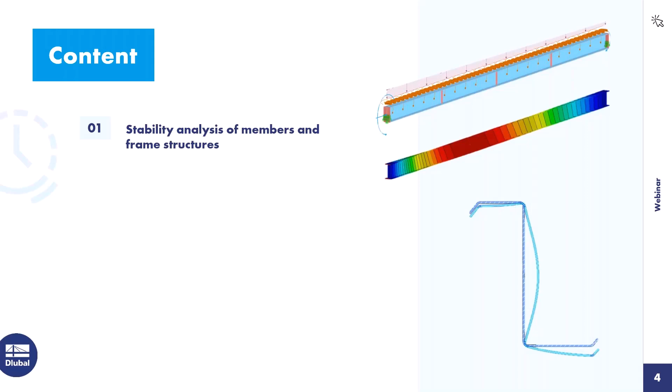Thanks Andreas for the introduction. Within this webinar, I want to show you the linear stability or bifurcation analysis that we can use in Rfem 6 as a tool to assess structural stability, and how to use this tool, including where it's used internally in the background to assist the design of, for example, steel members. I'd like to demonstrate this on some smaller example models that I've mostly prepared beforehand, so we'll jump into more or less finished models instead of focusing on modeling complex structures—we'll do that maybe next time.

The table of contents looks like this. First, I want to focus on the stability analysis of members and frame structures. Second, I want to go to the stability analysis on a cross-section level using the finite strip method. Then I want to show you how the buckling analysis is integrated in the steel joints add-on. And lastly, I want to show how we can use the structural stability add-on for troubleshooting instabilities, how we can leverage that for this purpose.

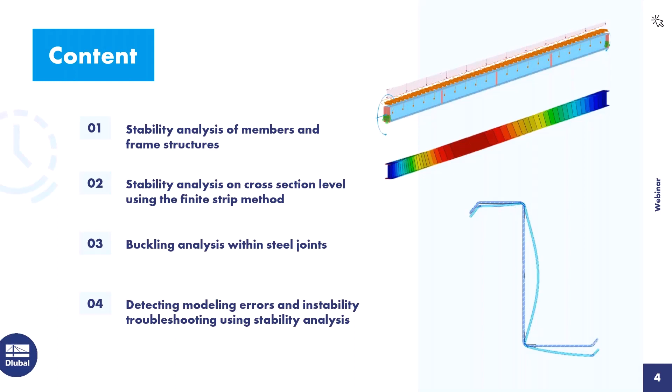Before we jump into the first model, I want to give you a brief introduction and explain at the very least a few points related to the stability analysis and how we perform it in Rfem 6.

What elements or structures are we addressing with this analysis method? It's usually slender members and structures under compression that tend to become unstable, where slenderness is not only defined by dimensions—the greater the length of a structure or member compared to the cross-sectional dimensions, the more slender and prone to instabilities it is—but it's also related to material properties. If I have a material with high strength and low stiffness, stability failure is more likely to be the critical design element as opposed to cross-sectional failure. Lastly, boundary conditions play a major role: if I have rotational or lateral restraints for a member, it's less likely to become unstable.

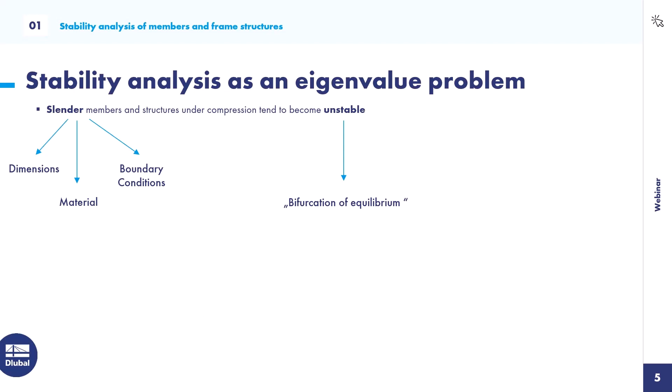What do I mean by unstable? When we reach the unstable state, we have no clear state of equilibrium; instead we have a bifurcation of equilibrium, meaning there are multiple paths the structure may follow. That's why this linear stability analysis is often referred to as a linear bifurcation analysis, or LBA—I might use that abbreviation throughout this webinar—and the critical load may also sometimes be called the bifurcation load.

Using the FEM, the ideal bifurcation load can be determined by solving a conventional eigenvalue problem. So we can set that up and solve that.

In that context, what does ideal mean? It means that for the stability analysis we treat the structure as linear. So we assume a fully linear structure behavior and a perfect geometry, so the base geometry of our model is used in this stability analysis.

The eigenvalue problem in the general formulation has two symmetric matrices, A and B, the eigenvalues lambda, and the respective eigenvectors x. To solve for the unknown eigenvalues lambda, we have to set the first term of our formula to 0, and that's mostly done by calculating the determinant of this first part in the bracket and setting it to 0.

We have multiple numerical tools or solvers to do that determinant determination.

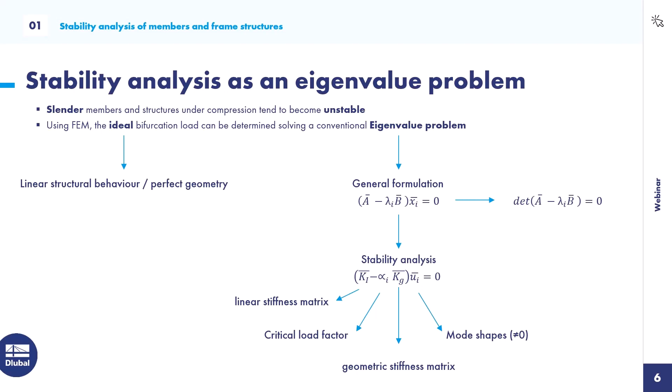We want to start with some fundamental solutions that are very well known amongst civil engineers. Euler already in the 18th century provided some simple analytic solutions for prismatic members under pure compression. They are well known as the Euler cases.

And try to simulate an Euler case 2 and make a small comparison to see if we can evaluate the correct critical load according to Euler, and what else we can get from this structural stability analysis.

So let's jump into the program. As I said, I have prepared some smaller models for you. The first one is this simple Euler case.

I have an HEB 300 beam with a length of 5 meters, and I applied a unit load of 1 kilonewton that sets the member under compression.

In order to perform a stability analysis with our add-on structural stability, I need to first activate it, and I can find it in the base data of the model. I activate the respective add-on here, which you can find under analysis add-ons, and click OK.

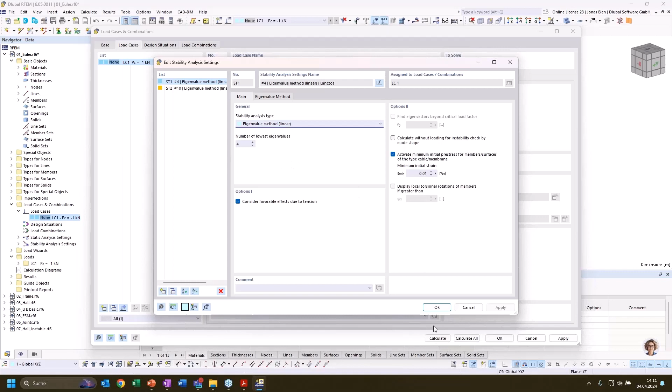4 eigenvalues are enough for our simple case, so I keep this number set here. And then we have these multiple solver variants to solve the determinant of our eigenvalue problem. But the default solver should mostly suit us for this problem.

There might be cases where you have subsystems that are not connected to each other. Then this default solver will throw an error and suggest another solver variant. But with these default settings, I can just run the load case.

Now the first thing the program is doing is solving the static analysis, and then solving for the stability analysis. When I have performed the stability analysis, I not only get the results for the static analysis, but I can also switch to the stability analysis results by this drop-down menu here.

Okay, so what do we see here? First of all, we get a drop-down menu here in the upper left corner, and also in the table we can see that we have these 4 mode shapes calculated with a respective critical load factor.

This represents the factor which I can multiply the external load with until my system would collapse due to instability. So if I would increase the unit load of 1 kilonewton up to 7,035 kilonewton and run a second order analysis, my system would become unstable and I would get an error message saying me that. So I can read these critical load factors here.

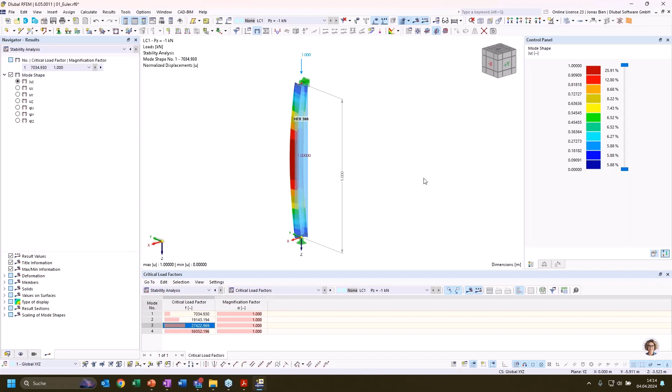Okay, so we can go through the 4 eigen modes here by clicking the table entries, or also go through the entries in the drop-down menu. And we can see the first eigen mode that is presented to us would resemble buckling of our I-beam around its weak axis. And it's doing that in a symmetric way. We have a simply supported beam here, so that looks like expected.

Then the second mode shape would be buckling around the strong axis. And the third and fourth eigen mode are some multi-wave eigenmodes for buckling around the weak axis. These are mostly not very interesting for us, so usually only the mode shape with the lowest critical load factor is of interest for us.

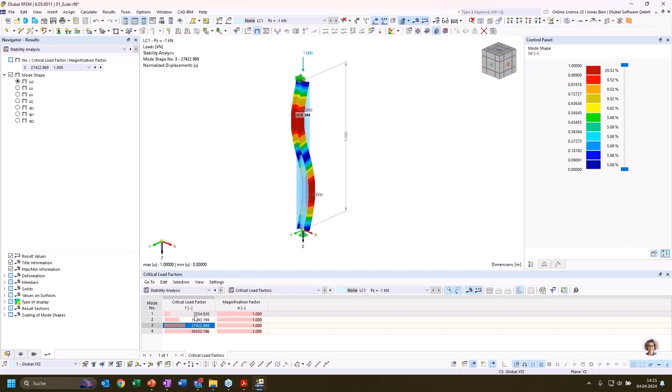And I want to know now, compare the critical load factor that we have calculated here with the critical ideal Euler load that we have for our Euler case 2.

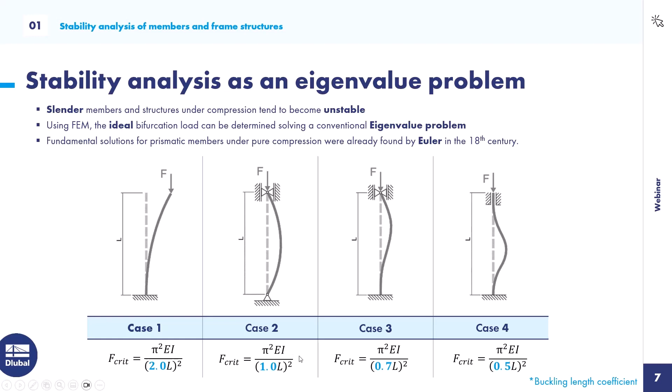Just so that you remember, we could calculate it just using this formula: pi to the power of 2 times the Young's modulus times the moment of inertia of our section, divided by the effective buckling length. In this case, it would be the length of our member times 2, to the power of 2.

And I could do that using my calculator, but then I would need to look up all the values for my section, the member length, the material properties, and so on. So I want to show you an alternative solution. We can also use the in-app console that we can open via the toolbar.

And in here, I can reference all the objects that I have in my model. For example, I could reference my material number 1 by typing this and then typing a dot, and then I see all the objects or properties that I can ask this object for. For example, I would find the elastic modulus here, and if I press enter, I get as an output the elastic modulus of our material number 1 in SI units.

So that's important. And of course, I can do some more complex calculations here. I could now take this elastic modulus, multiply it with the moment of inertia of my first section.

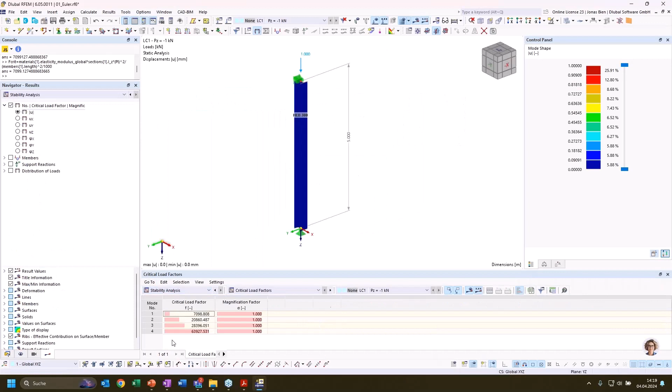So if we want to compare values, we can manually deactivate the shear stiffness for our section in RFEM and do the calculation again and see what our critical load factor would now be. And if I again go to the results, we now see that our critical load factor is much closer to the ideal Euler load.

It compares very, very well.

So we could, of course, also calculate the critical load for buckling around the strong axis. We just need to swap the Z with a Y value, and we have the moment of inertia about the strong axis. This value is quite satisfying when we look at our result from the structural stability add-on. So that compares quite well. We've, as we expected, met the results of the analytical formula.

Now that that's set and we are confident that our solution provides reasonable values, I want to show you another important result of our stability analysis when it comes to member results. This is often used for the later design of the column. If we, for example, would take a classic approach to design this steel column using an equivalent member method, we would need the effective buckling length, and we can use the structural stability add-on to calculate it.

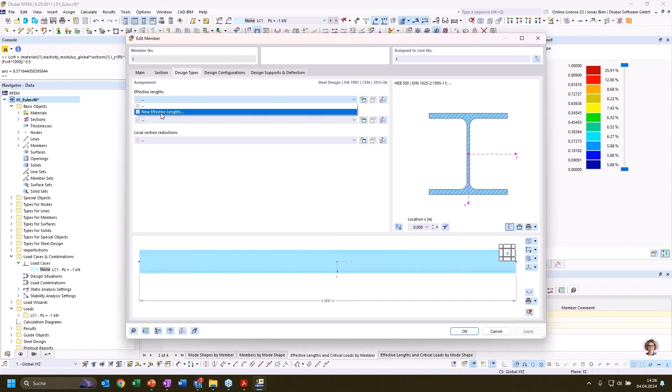One thing I want to show is that we can directly import these buckling lengths into our design add-on. So if I want to design this column here with our steel design add-on using the equivalent member method, I have to assign these effective lengths.

Here I have the option to import the buckling length from the stability analysis. If I click this, we get another tab where I can enter the load case, the mode shape, and the member number. Now it would take this buckling length coefficient from mode number 1 for beam number 1 and evaluate the effective buckling factor to use for the design.

In this case, we have to take care that buckling around the strong axis happens in mode number 2, so it is observed in mode shape number 2. We would need to enter mode shape number 2 here, and mode shape number 1 would be for the buckling length coefficient for buckling around the weak axis. So that would fit and suit our expectations.

Of course, we can do that for more complex systems as well. We just need to keep in mind that when we have a more complex system and we change something, the order of the mode shapes can also change. They are always sorted by the lowest eigenvalue or the lowest critical load factor.

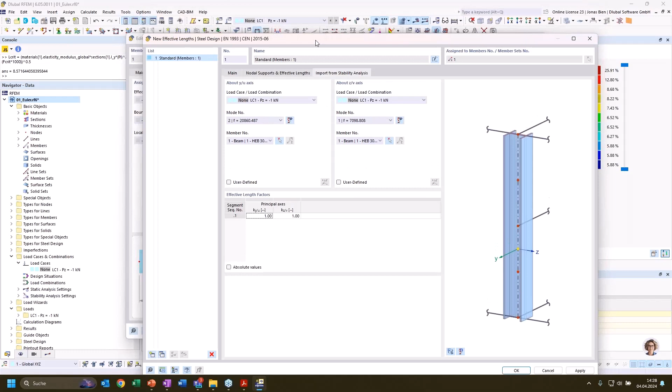The mode shape with the lowest critical load factor is always mode number 1. If we change something in our system, it can happen that this sorting changes, but these entries then need to be checked again because they are not smart or able to adapt to the changed model. So we would do that manually. That needs to be taken into consideration. Sometimes it's just better to do the stability analysis and then manually put in the buckling length coefficients here, so we don't need to worry about it anymore.

All right, but that's not what I want to focus on now. I want to show you instead how the buckling length coefficients change or adapt when I adjust the statical system.

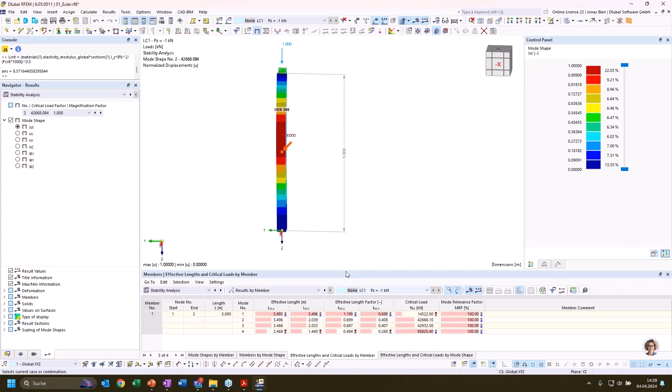So when I, for example, take a rigid boundary condition at the member at the bottom of this column, it should calculate a lower buckling length coefficient because now the system resembles Euler case number 3, and we know that here we would expect a buckling length coefficient of 0.7. That's exactly what we get for the first mode shape for the weak axis and the second mode shape for the strong axis in this case.

We also need to take into consideration, for example, these cases - why should I use my add-on here? Because these cases are known, I can just apply the Euler formula and calculate my buckling length.

But what if we have something like a certain spring stiffness here, which means I'm with the stiffness somewhere between Euler case number 2 and Euler case number 3? Here it's not so obvious what the buckling length for our equivalent member check would be.

Of course, we could look into textbooks that have these cases covered, but also here we can use the structural stability analysis to evaluate the effective buckling length factor. As we expected, it is between 1 and 0.7.

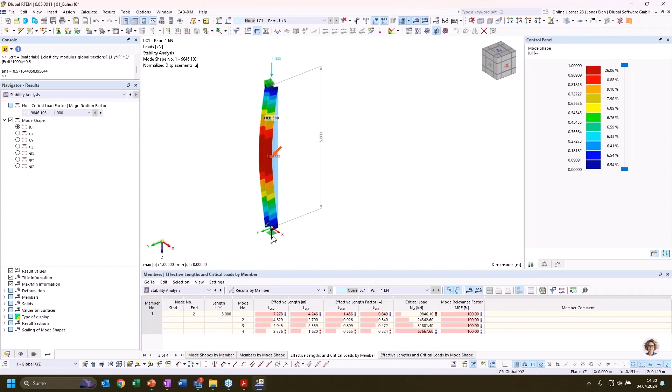So everything's set. Because it's a linear analysis, it is interesting what the program does with nonlinearities.

So, for example, if I apply some kind of nonlinear boundary conditions here, which at first glance don't look that nonlinear - in this case I want to apply a stiffness diagram where I have the stiffness of our spring at the column bottom in relation to the vertical load, but as you can see it should be constant, and no matter what the vertical load in the column is, the spring constant should always be constant.

So it doesn't look nonlinear at first glance, but we have to take into consideration that all these nonlinearities are ignored in the structural stability analysis. I want to just demonstrate this.

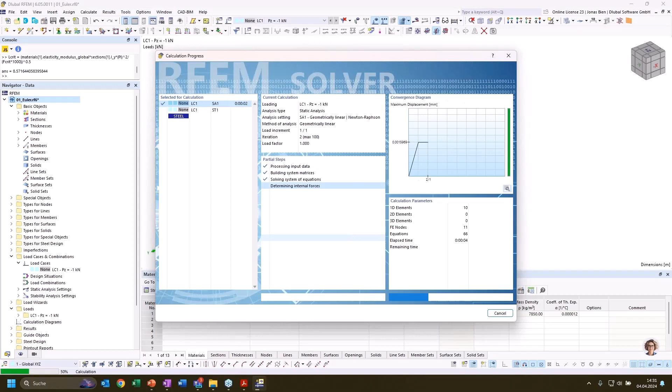Although we have set this nonlinear spring stiffness at the bottom, as a result we get Euler case 2, where a pure hinge is assumed at the bottom. So only when it comes to the supports, only these entries are taken into consideration for the structural stability analysis.

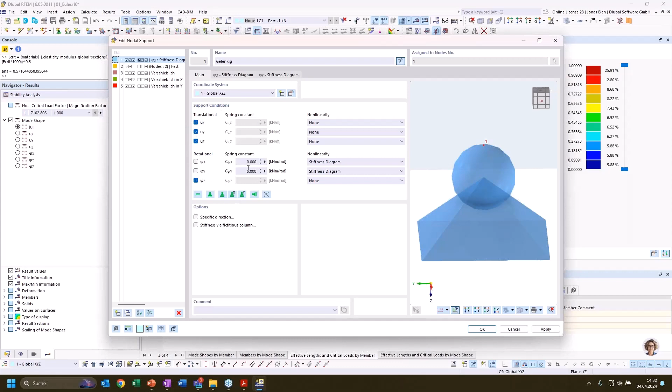Of course, when we are working with other nonlinear elements such as tension rods or buckling members, these are taken into consideration or not according to their state in the static analysis. So if we have a tension member that is under tension, it will be taken into consideration in the structural stability analysis as well, and vice versa.

Okay, then one last thing to finish this simple example here. Let's delete this nonlinearity and see what happens if we divide this member in half.

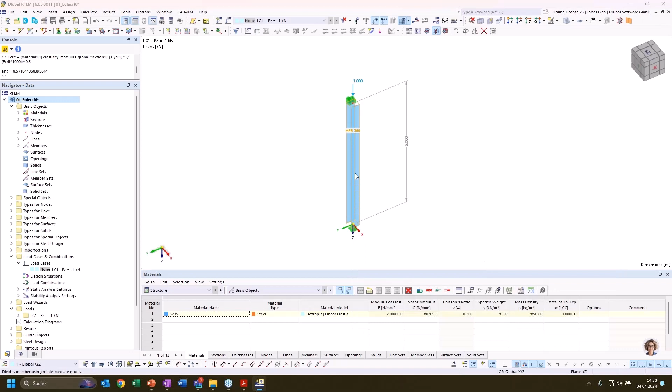I'll introduce an intermediate node and divide this one column into 2 separate members, and again run the structural stability analysis. What does it do with the buckling length? Is it still valid, or does it give me some weird results?

Let's see. The critical load factor is still the same as if we wouldn't have divided this column. And the buckling length, or the effective length of our members, is also the same. So now we have two members, but the effective length for each member is still 5 meters, and that's expected when we look at the formula for calculating our critical buckling length, because the Young's modulus, the moment of inertia, and the critical load factor have not changed.

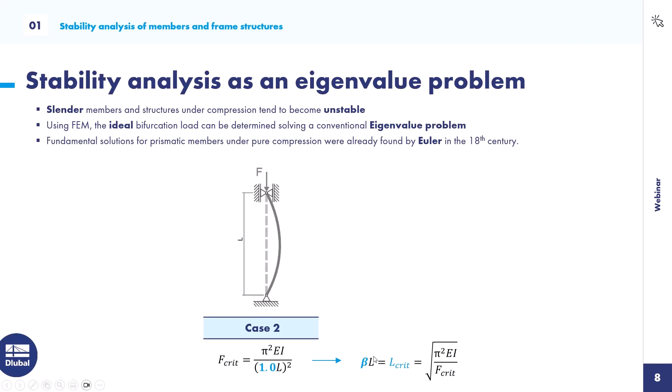The only thing that changed is our reference length L for the member. It's divided in half, and that's only visible in the buckling length coefficient, which is now 2 instead of 1 for each of the members. So we could still use this effective length factor for stability design within steel design or some design add-on. It would still be valid.

Okay, now let's increase the complexity a bit. What if we have more than one member in our model? In this case, we have a 2D model of a two-hinged frame with an additional column number 5, just connected to this 2-hinged frame by a truss member.

This is basically a simply supported column, just as we've seen before, which leans toward this 2-hinged frame, or is supported by the 2-hinged frame at the column head. All 3 columns, member number 1, 3, and 5, are loaded with 1000 kilonewton in compression.

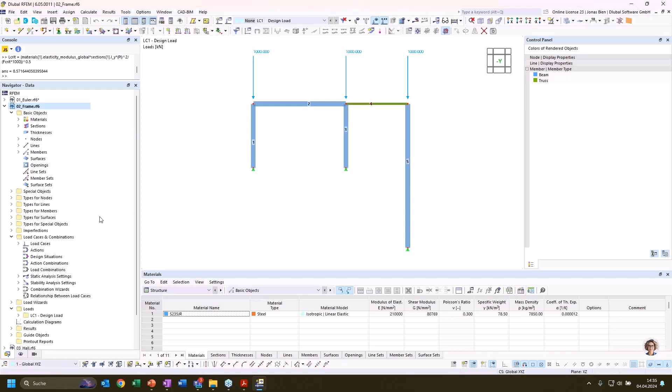Now let's perform a stability analysis for this load case as well. It should be all set for this analysis, same settings as we used before for the Euler case. And accordingly, we also get 4 mode shapes for our structure. I want to quickly browse through these mode shapes together with you.

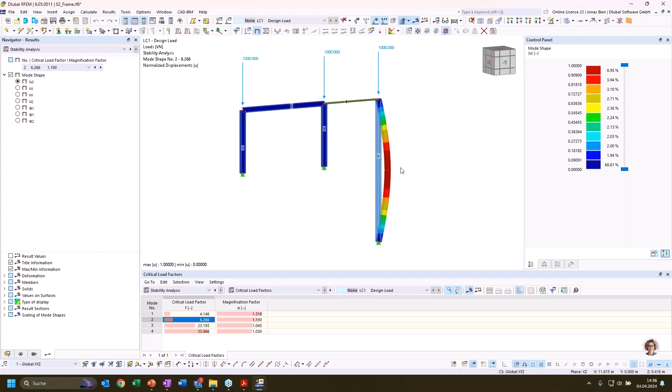The first one is some asymmetric lateral deformation of the 2-hinged frame, and also this connected pinned column is moving with the 2-hinged frame. Then the second mode shape would represent buckling of the longer column with pin supports around the strong axis. The rest of the structure does not seem to have any deformation.

The third would also be a higher mode of this pinned member number 5. And mode shape number 4 would resemble a symmetric buckling mode of the 2-hinged frame without any participation of the simply supported column here at the side.

So if we want to now extract the effective length, for example, for the columns of the 2-hinged frame, we can again go to the member results of the stability analysis and check the effective length by member. I can then click on one of those members and I'll automatically be routed to the respective table entries.

In the first mode shape, as we've seen, this 2-hinged frame suffers from buckling around the strong axis, and we could read the effective length factor accordingly for the strong axis in this column right here. So we get an effective buckling factor of 2.8, which is also in the realm of expected results for such 2-hinged frames.

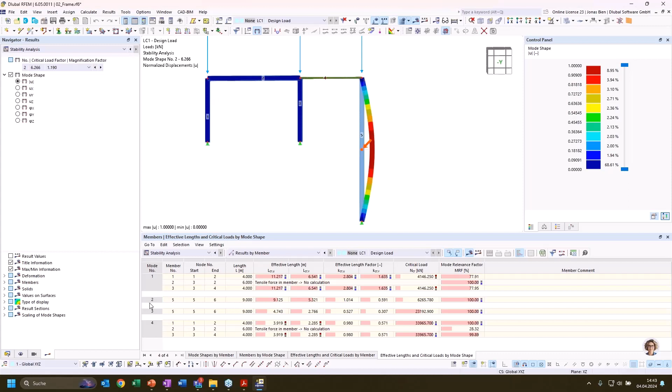For example, we could say we're only interested in members that have a mode relevance factor greater than 20%. If we do so and go through the mode shapes, we see for mode number 2 we have only one entry, which should be a localized stability phenomenon and not so much related to a structural failure of the whole structure or substructure. That way we can use the mode relevance factor to filter mode shapes for our purpose, for example, for the determination of effective length factors.

Here I would go the other way around. When I'm interested in the relevant buckling factor for column number 1, I would go through the modes I've calculated and only take into consideration the mode shapes that have a mode relevance factor that is significant, and read my buckling length factor from the mode that has the lowest critical load factor. In that case, I would definitely take the value of 2.8 for column number 1 and also for column number 3.

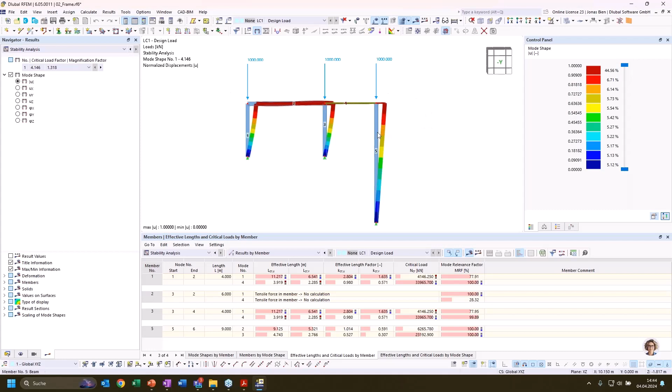But I want to show you in the next step how we could also leverage this tool in a more realistic setting, or how to approach the buckling length determination in a more realistic model.

So here we have an industrial hall. We have a lot of different load cases here that would give us some, I don't know, probably about 100 or 200 load combinations. Of course, in some applications, we can have a lot more load combinations. Then the question is which load combination, or the first question for our buckling length determination, is which load combination is most severe for buckling for a specific member.

I have deliberately started with result combinations for this case, because sometimes, for example, when I want to design bridges, I may have 10,000 load combinations, and it's not possible to calculate all 10,000 and assess them for stability. So what I'd recommend, if you have too many load combinations to handle in one model—here it would still be feasible and no problem, but if you have additional load cases, that can be a problem.

I would, in the first step, calculate my combinations with result combinations to get the envelope of results. I need to calculate the design situation where the complete envelope of all result combinations is given. And then, for example, when I want to design the columns for buckling, I would look into the internal forces in this envelope solution and look for the most critical ones for buckling, which would be the combinations that give the highest compressive load in the columns.

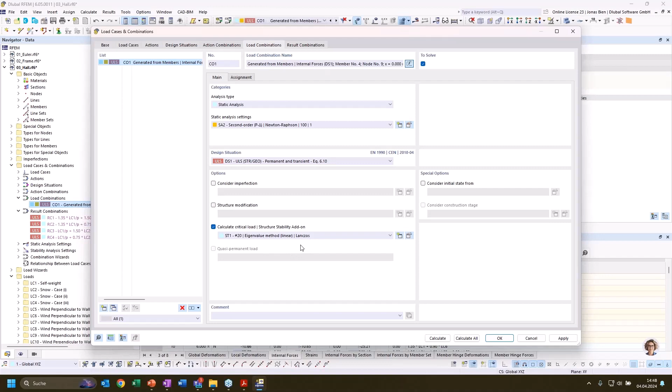And now from the result combination, just by right-clicking this combination, I can generate a load combination from this table. And for this load combination, where I have the feeling that this could be most relevant for buckling of our columns, I can now perform an eigenvalue analysis, a linear stability analysis, by just activating it here and calculating it. So now I very specifically run the stability analysis for just this one load combination that I have generated from the envelope.

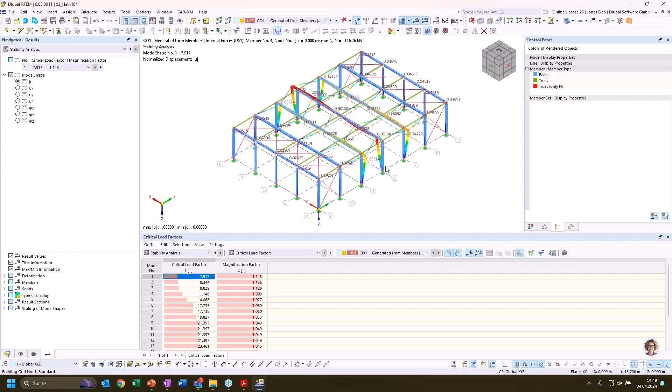Now the second question, after we have sorted out which design situation could be relevant: I would now have to figure out, for this column, which mode shape is most relevant for the determination of my buckling length. So again, as before, I have 20 critical load factors and mode shapes, and I can browse through them. Some involve deformation or buckling of the frame where this column is involved, and some are only isolated buckling of these columns, or some compressive member in the roof, so these wouldn't really interest me.

In order to filter these out, I can again use the mode relevance factor. So I go to the table effective length and critical loads by members, click on my member number 4, and get the whole table. I get the mode relevance factor for all 20 mode shapes that I have calculated, and I see that only in 2 of these mode shapes is my column member really participating. So these would be the only 2 mode shapes suitable for extracting the buckling length.

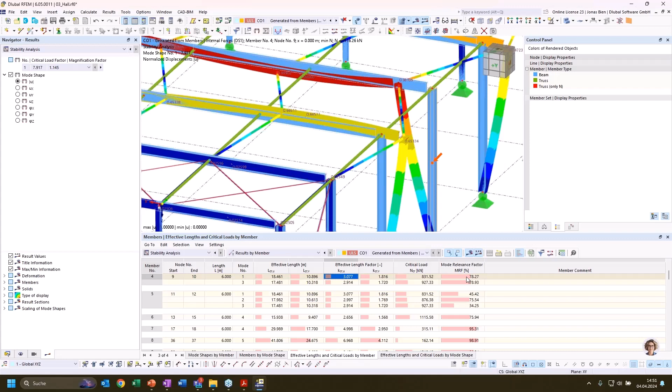I could apply the filter to make it more accessible, and then follow the same rule as in the last smaller example: take the mode that has the lowest critical load with a significant mode relevance factor, and take the effective length factor for buckling around the strong axis from this mode shape. This is how the mode relevance factor can help you assess the relevant mode shapes for a particular member design.

That's what I wanted to show you on this model. Now I want to take the next step and highlight something you may have noticed: we have only discussed flexural buckling of members, but especially in steel structures, other stability modes can also govern the design, namely torsional buckling or lateral torsional buckling. We can also investigate those stability modes with our structural stability add-on, but we need to activate warping torsion in order to detect those stability modes.

I want to make another small example where we investigate the lateral torsional buckling of a simple system, where again, as in the first Euler case, we know the exact solution, and I want in the first step to compare the values we get from RFEM with the analytical value. So in order to perform a structural stability analysis considering lateral torsional buckling, we would in addition to the structural stability add-on also require the torsional warping add-on.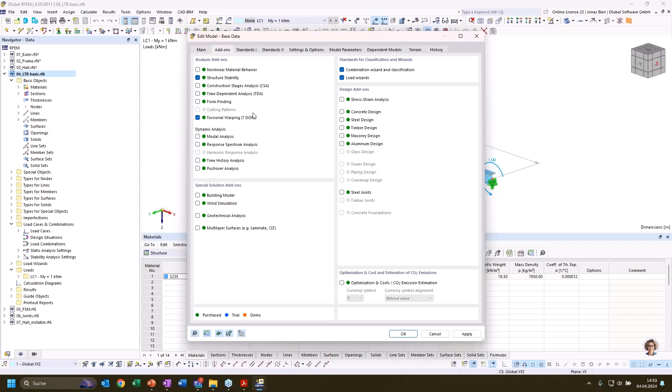And as soon as we activate the 7th degree of freedom, this would be directly included in the stability analysis, or would be taken into account.

I have now this simply supported member here, an HEB 300 again, with a length of 10 meters and a constant bending moment. I could run the stability analysis, and now we are not only getting modes for flexural buckling - or we wouldn't get any flexural buckling modes for this member at all because we have no compression in it - but I didn't activate the structural stability analysis for this particular load case, so I will just do that.

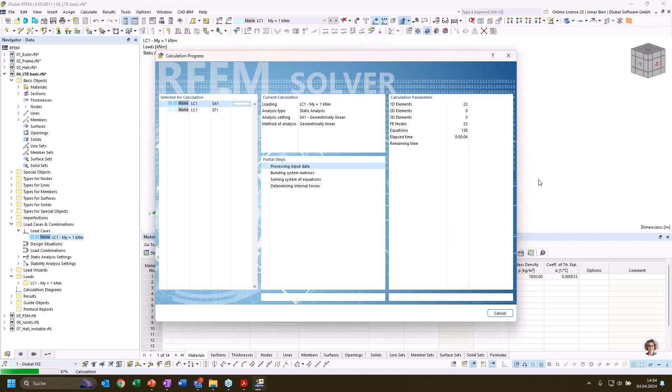Now we should get a lateral torsional buckling mode. When we switch to the results of the stability analysis, we can now see very clearly this characteristic deformation of our member: it tilts and at the same time moves in the direction of the weak axis.

And again, we get a critical load factor, and this one we can compare with the analytical solution. For this simple system, an analytical solution can be easily found in the textbooks. It was once also implemented or written down in some of the codes, for example in the old German steel construction norm DIN 18800. I think in some national annexes of the Eurocode 3 it's also given, this formula.

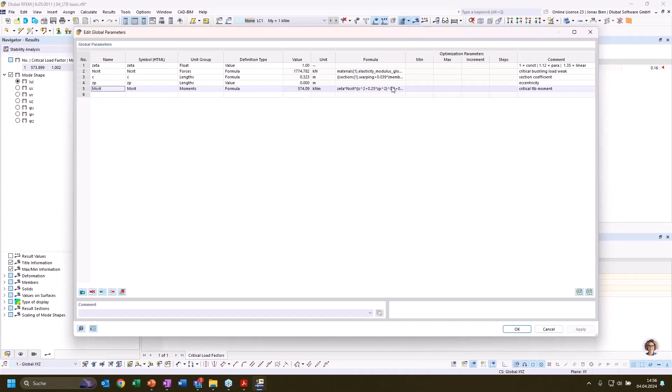But for our convenience, I already plugged this formula to calculate the critical bending moment for lateral torsional buckling into our global parameters. So that's another thing I can do instead of just using the console and typing in my commands to evaluate certain parameters or values - I can also use global formulas, global parameters, to calculate something. For example, I have now created a formula for the evaluation of Mcrit, and we can look at what goes into it. Maybe this looks somehow familiar to you.

So here we have a value or parameter that describes the moment distribution, which is zeta. It's 1 in this case for this simple case with uniform bending. Then we have the elastic buckling load, Ncrit - that's the one we already assessed in the first example. Then we have some parameter C that takes into account the warping and torsional stiffness of our section. And we have ZP, which resembles the eccentricity of the loading, which is not important in this case. And what we get from this formula is a critical bending moment of 574 kilonewton meter.

We could also use the console again to evaluate this. So all the global parameters that we have stored, we can call them here in our console. In this case it's written in SI units, so I would need to divide it by 1000 to get to kilonewton meter. And this is very close to the value that we evaluated here with the structural stability add-on, so it works again quite well.

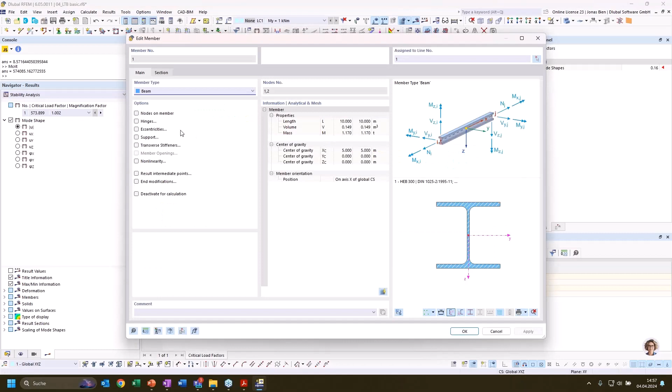But of course, as in the Euler case, we can use our structural stability add-on to investigate much more complex cases. For example, we could add a member support. So I go to the member and add a support, and then I get this tab here where I can enter a member support. I could manually put in some rotational restraint, I could even apply an eccentricity of this member restraint - for example, I could say I have a rotational restraint at the top of the flange.

And we can now also in the global analysis take into consideration shear panels and rotational restraints. So these are entered as fictitious stiffness, and you may know them from steel design, aluminium design, or timber design, where you always had access to those restraints, but they were only considered in the design of the member - in the design add-on. But we can now use them in the global structural stability analysis as well.

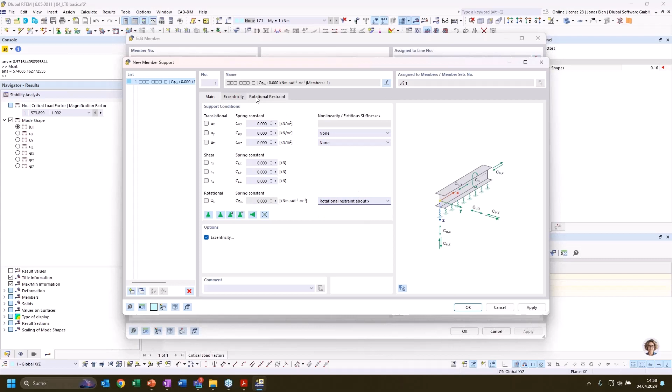So I could, for example, define a rotational restraint - say I want to consider some kind of sheeting that I have on top of my girder. I will just take some random settings, more or less - some sheeting just to get some stiffness. Of course these values were accessible all the time, but now we can, as I said, also leverage or use the stiffness that we define here in this global structural analysis.

And one thing that is also new, and I want to highlight to you, is that for the spring stiffness of the connection between the trapezoidal sheeting and our member, and also for the load introduced to the sheeting, we can now set load-dependent values.

If we click these options here, we could, if we had multiple load combinations that we would like to investigate, set different values for different load combinations, for example, to distinguish between situations where we have suction on the roof and compression or pressure on the trapezoidal sheeting. We could take this into account by adding different values in the table.

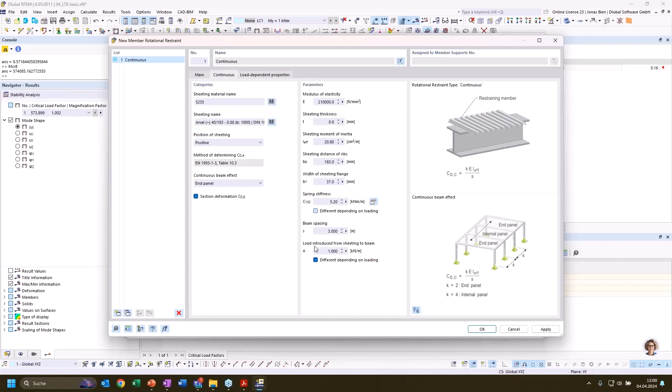This is also quite new, since a few months. With this rotational restraint, I could also add a shear panel. And by the way, we're now able to add a shear panel not only in the Y direction, but also in the Z direction, which could be interesting for columns that are also girders rotated by 90 degrees for some reason. We can use that now since some weeks.

We have now calculated directly some stiffness for the rotational restraint from our trapezoidal sheeting, and we could consider this in the stability analysis to take it into account. By default, these fictitious stiffnesses from the trapezoidal sheeting would only be accounted for in the design add-on.

So if we activate the steel design add-on, for example in this case because we have a steel girder, and I now activate the lateral torsional buckling check according to the equivalent member method, we already see that the default way of calculating the critical moment value is using the eigenvalue method - the same method we also use in the structural stability add-on.

Of course, we need to set some boundary conditions here for the design add-on. But in our case, it's quite simple. We have simple support with fork supports, and that's what the default settings are also for the effective length settings. So that should be all right.

In order to perform the steel design, we also need a design situation and some load combination inside this design situation. I will just add a load combination with 1 times the first load case. And if we now do the calculation, we are running a static analysis, then the structural stability analysis of this member, and then the steel design analysis.

Let's check the results and compare them. First, in the stability analysis, it seems like nothing has changed. We still have a critical bending moment of 574 kilonewton meter.

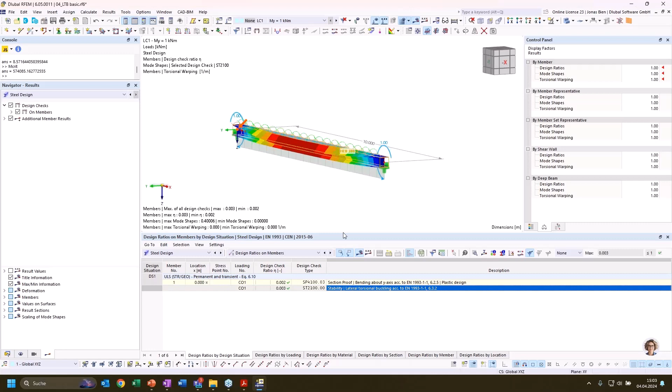But in the design add-on, let's check the result here. We have now the check for lateral torsional buckling. We can also see what the relevant mode shape would look like if we click on this design details. And if we double click on the design details, we can also check what value for Mcrit is evaluated in the internal eigenvalue analysis.

We see that now in the steel design add-on, the rotational restraint on top seems to already be taken into consideration, because we have a much higher critical moment in our steel design add-on, while in the structural stability analysis the values stayed more or less the same.

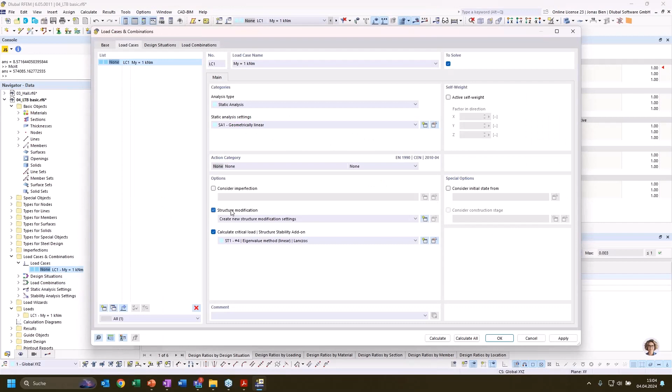But we have now the option to take these fictitious stiffnesses into account also in the structural stability and static analysis. We can do that by adding a structure modification to this load case, and here we just need to activate the option to consider shear panels and rotational restraints also in static, stability, and modal analysis.

Before, it was only possible to take these shear panels and rotational restraints into account in the design, so in the LTB design within the design add-ons. But now we also moved this possibility to the global analysis, because you may want to perform a lateral torsional check, like using a second order theory analysis with imperfections, and you may also want these rotational restraints to be effective in this global analysis.

So that's why we added this option through the structural modification. What is also new is that you find these objects - the member shear panels and rotational restraints - now under types for members, and not anymore under the types for the design add-on. Like in earlier releases, we had those two objects under, for example, the types for steel design or aluminium design or timber design. Now you find them under general objects for types of members.

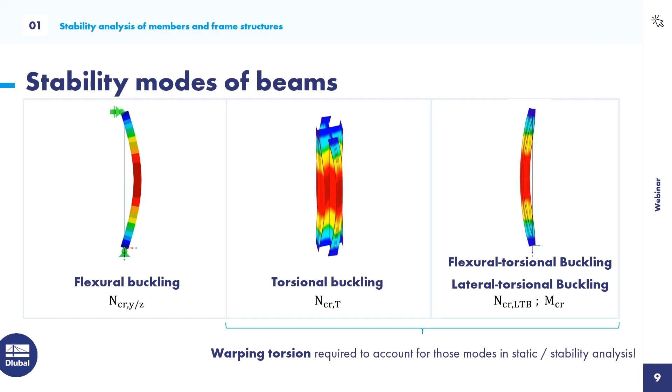If we are interested in local buckling of the cross section, we could extract from these beam models a shell model, which is quite easy in our software. You just right click on a beam member and say you want to generate a surface model from this member, and surfaces are directly generated with the correct thicknesses, just as they had for the member. For example, the top flange would already have a thickness of 19 millimeters corresponding to the HEB section. Then we could mesh this very finely to do stability analysis for this shell model.

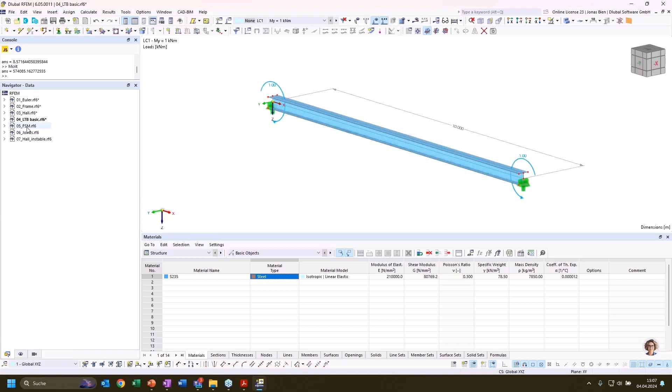By doing so, we could also analyze local buckling modes of the section. Since it's not very interesting to do it with a hot rolled section, which in this case is not susceptible to those local failure modes, I want to do it with a cold formed thin walled section. So here I have prepared a fifth model with a parametric C section with a height of 200 millimeters, width of 75, and a wall thickness of 2 millimeters. That would be a perfect example for a thin-walled, cold-formed section.

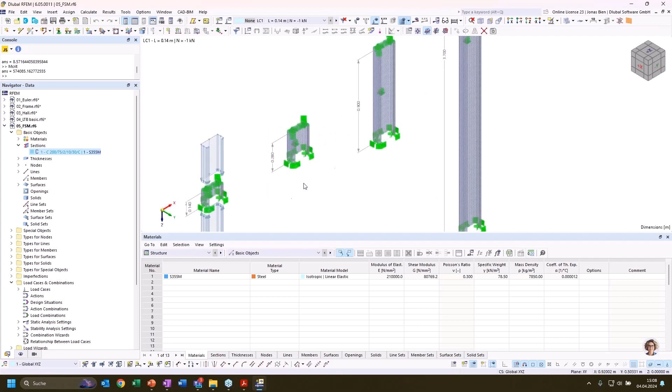As I just showed you, I transferred my beam model into a shell model. I meshed it very finely in order to get all the relevant local buckling modes. Then I modeled 4 different members with different lengths: a very short element of this C section, one with double the length, one with a length of 90 centimeters, and a very long C member as a shell model.

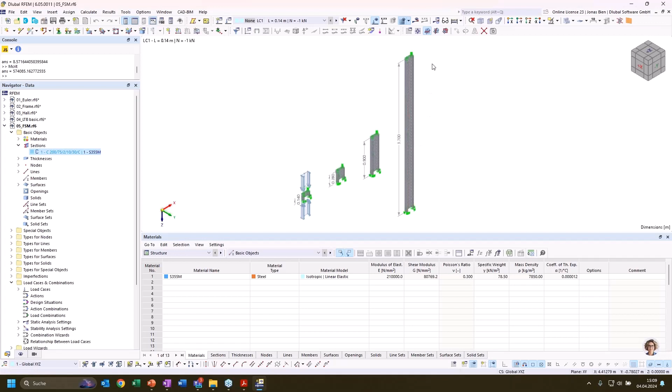I applied some boundary conditions that avoid any unwanted singularities in the model. Then I applied, in 4 different load cases, a unity load to the top and bottom of these column stubs. So as in the first step, that should resemble the Euler case - a beam with a certain length with uniform pressure applied. But in this case I have a monosymmetric cross section, which is very thin. Let's check out the results.

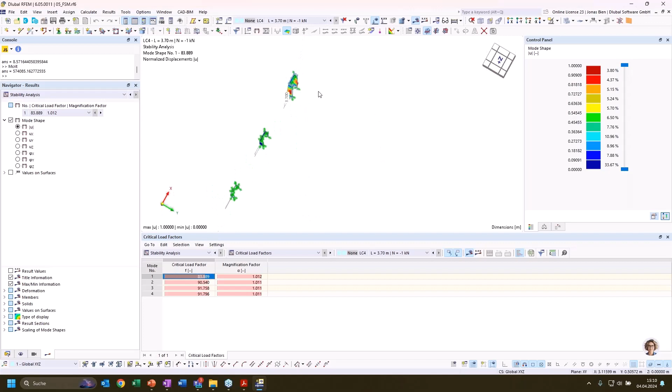What do I get from such a stability analysis? I performed a stability analysis of the shell model. If we look at the results for the longest segment, this 3.7 meter long C section, I have the first critical load factor at 84 kilonewton, and I can see that the mode shape resembles flexural torsional buckling. So in this case I don't see local buckling of the different cross-sectional elements, but the whole section deforming at midspan.

If I check the second mode shape, I have buckling about the weak axis. The third mode shape involves local buckling of the web, and this we can only see with such a refined shell model.

Now what happens if we take a shorter column? We see that the critical mode shape is governed by local buckling. So in this case, global buckling like flexural torsional buckling or flexural buckling wouldn't be the major issue, but stability failure would be more related to local buckling of the web.

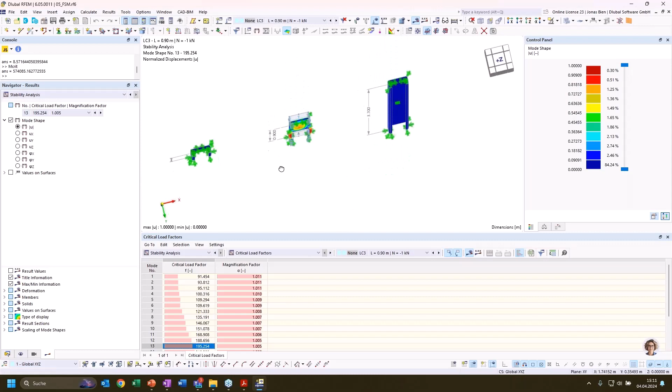I can go through this and find several mode shapes where especially my web buckles in different configurations. Then in mode shape number 13, I find a mode shape particularly interesting for cold-formed members: distortional buckling. In this case, not separate elements of the cross-section deform, but the whole cross-section bends. At the midsection, the lips deform horizontally, and at the same time the web is also deforming. Finally, for the very short configurations, I again find the local buckling modes.

What is also important to note is that the critical load factor is not changing significantly. The most relevant critical load factor doesn't change a lot when we compare the three smaller column segments here - we are always around a factor of 90.

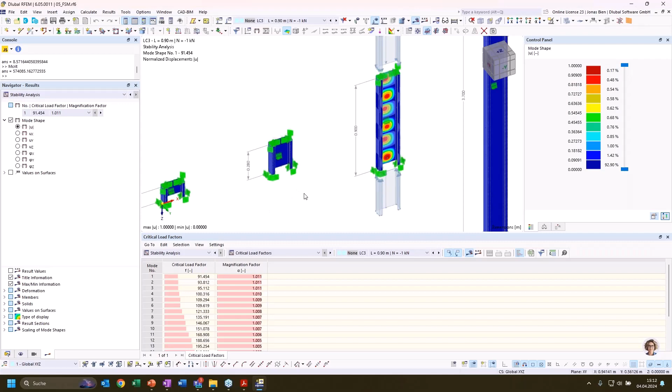But of course this type of analysis comes with a drawback. It's quite cumbersome to prepare this kind of model. We see that we require quite a fine mesh to get valuable results, and calculation in this case would take 1 or 2 minutes for these 4 cases, because these are quite a lot of elements and degrees of freedom that we need to solve.

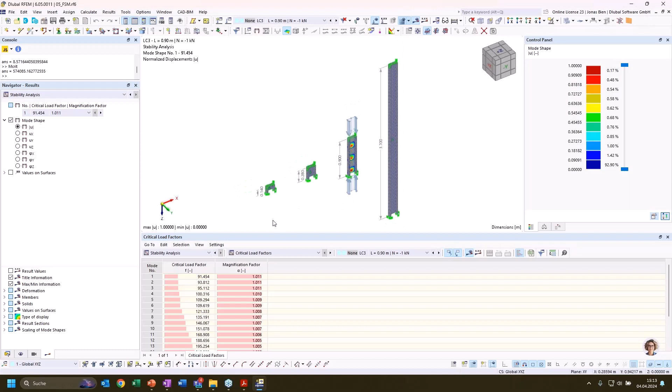But we have also another alternative option to investigate such failure or local instability modes on the cross-section level. This is kind of hidden in the edit sections dialog, and that's why I want to show you that and highlight that we have this feature.

So for a particular section, we have on the right side this preview of the section with all the dimensions and so on. Below that, we have a drop-down menu where we can find a lot of interesting features and functions of this cross-section, for example, unit stresses under certain loads.

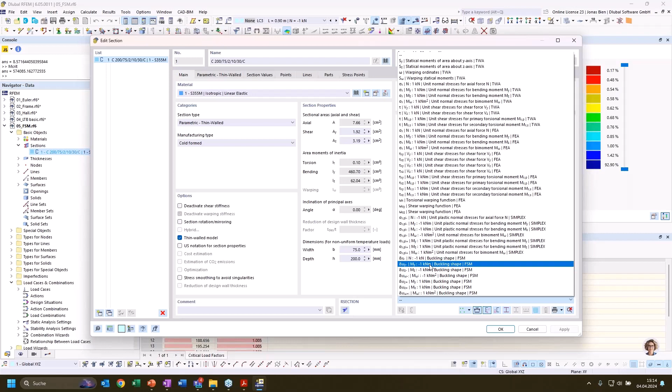But right at the bottom, we also have the possibility to investigate the buckling shape of this section for some unit loads, for example, for a 1 kilonewton compressive load or for 1 kilonewton meter bending moment around the strong axis and so on. If we click on that option, I can see that I get a diagram as a result.

What I get here is the so-called signature curve for our cross-section. It gives the relationship between the critical bifurcation factor for this unit load, 1 kilonewton compression, in relation to the member length. So we can see that in the start, we have a very low member or small member length.

In this case, for example, the first minimum is evaluated for a member length of 14 centimeters, which would be the smallest column stub that we have just investigated with our shell model. And when we look at the respective bifurcation factor, we see that it's around 90, which does correspond well to the linear bifurcation load that we have received from the stability analysis on the global level in the shell model.

On the right side, we can also see how the cross-section deformation would look like in this particular mode shape. And we can go along this signature curve and investigate the different mode shapes that would be critical for a certain buckling length.

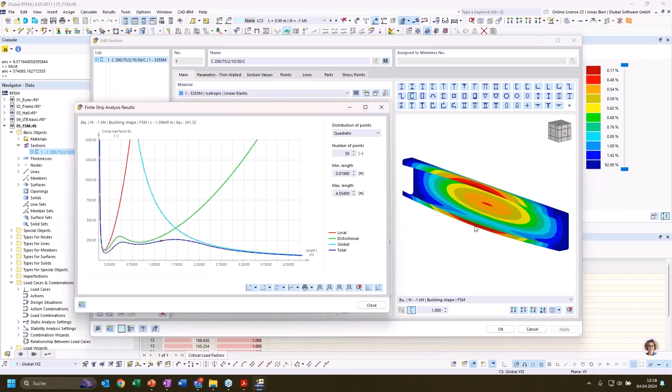And what happens in the background? As soon as I start this feature here, in the background, the finite strip method is employed, and I want to show you what that means.

As we have now already discussed, we can do stability analysis of beams, which has the advantage that we have very few degrees of freedom. Or we could also investigate stability of members with our shell model, but here we have a lot of degrees of freedom, and solution takes quite a while.

And the finite strip method is some kind of intermediate accuracy solution where we divide the cross-section into multiple strips, and only one strip or element is used over the length of this member.

And when we activate the finite strip method in the edit section dialog, a lot of these FSM members are generated, and the eigenvalue analysis is performed, and the eigen shape is stored, and also the critical bifurcation load is stored. This happens on the go, so if we click it in the edit section dialog, it finishes for like 50 analyses within less than 1 second.

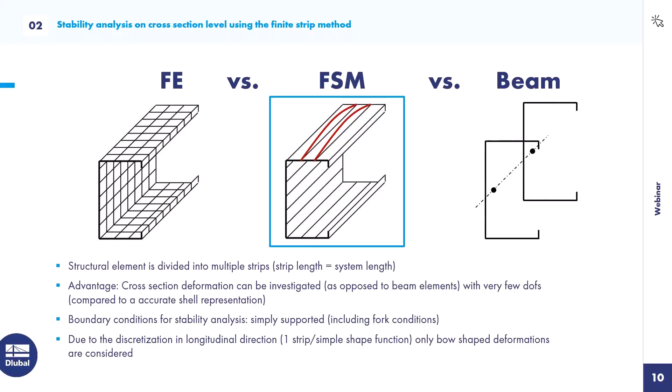So this is quite a nice advantage of this analysis method. One drawback, though, if we compare it with the shell element, is that at the moment we can only investigate specific boundary conditions. So the results are only valid for a simply supported beam that is assumed in the background.

We can only assess results for unit loads at the moment, and we cannot account for any local load introduction. Also, we assume that the behavior over the length of the member and the loading conditions are constant. And because we only use one strip over the length of this element to represent this member, we can only investigate failure modes or eigenmodes that are bow-shaped, with only one half-wave deformation.

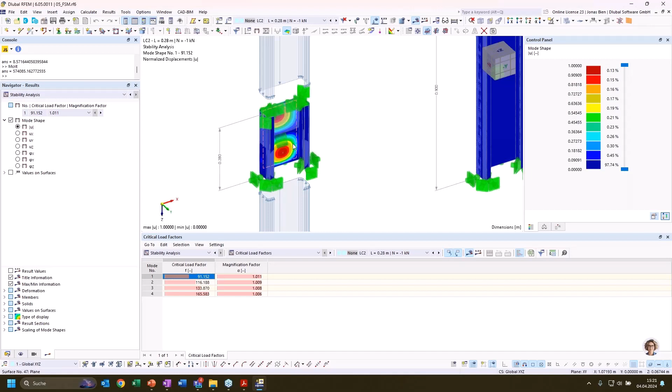But as we have seen in our shell model, there can of course be, for our second model here with a length of 28 centimeters, also local buckling as a decisive failure mode, where we have two buckles over the length of the section.

This cannot be represented or investigated with the finite strip method as we have it implemented into our program. That's why we should keep in mind that we not only have one curve for this local buckling with the bow-shaped deformation, but also a similar curve that has its limit or minimum at a multiple of the first critical member length. Here, the first critical member length was 14 centimeters, but at 28 centimeters we have a similar bifurcation load, just with a multi-wave local buckling in the web.

We have multiple of these curves, so we should take the minimum bifurcation load for local buckling or distortional buckling as a straight line in this dialog. If we compare this with the signature curve, we get a feeling at what point or member length global buckling gets relevant again before we have local stability failure.

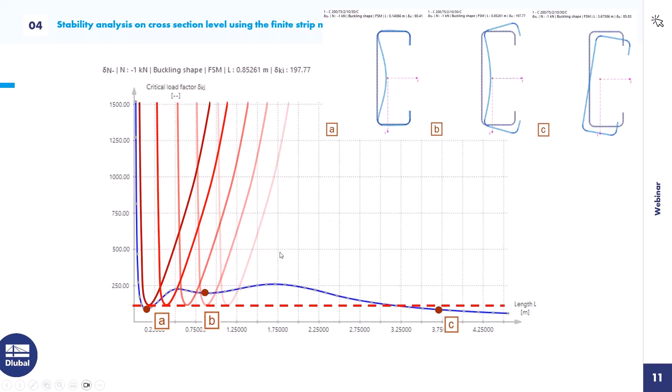This is not only a nice tool to get a feeling for which stability phenomenon can be an issue for my cross section. Depending on the member length I'm modeling, I could directly see that local buckling is not a big deal, and distortional buckling is not interesting for me — I'm in a realm where global buckling will govern the design. Or I could say maybe I'm at a length where local buckling and global buckling could happen at the same time, and I need to take into account some kind of interaction between these stability modes.

It also has a practical use. For cold-formed design within our steel design add-on, we use the distortional buckling curve evaluated on the basis of this finite strip method to evaluate the effective sections of our cold-formed section. So we directly use this minima, the second minima of this distortional buckling curve, in the design of cold-formed members according to Eurocode 3 part 1.3, and also for cold-formed design according to the American standard, the direct strength method. So it has a practical use and is already implemented in the cold-formed steel design.

All right, that's it for the second topic, the cross-sectional design. The two last topics will hopefully not take that much time to explain.

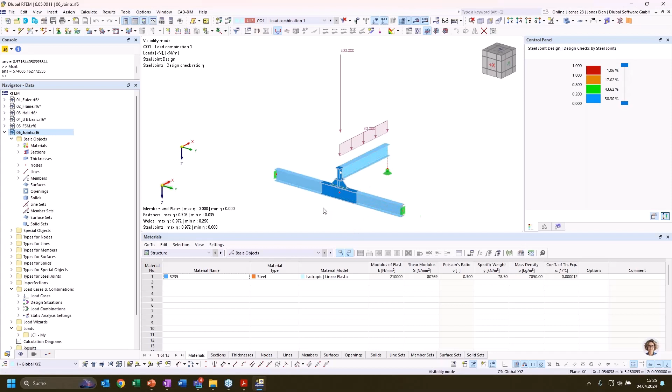I just want to mention as a side note that we can also perform linear eigenvalue analysis within our steel joints design. To demonstrate this, I have a relatively easy model where I have a connection between a secondary member and a main member, and the secondary member is loaded. I can not only do the usual steel joints design checks, but also perform a buckling analysis.

I first want to show you where I can activate it. You can find that in the ultimate configuration for the steel joint, under the first point, perform buckling analysis. If activated, not only the resistance of the components is calculated, but also a linear eigenvalue analysis is performed, and we can assess the results via the table. Here we see that we don't only have result values for the stress-strain analysis, but also for the buckling analysis.

In this table, we get the critical load factor for our 4 mode shapes calculated by default. We can also assess or analyze the mode shape by clicking on one of those table entries and opening the steel joints deformation or results button. Now I would see the mode shape for mode shape number 1 in this particular joint. I can browse through the different mode shapes by clicking the different table entries, and I can see that for this particular joint, in the first mode shape, I would have some kind of web buckling under the load introduction from the secondary beam.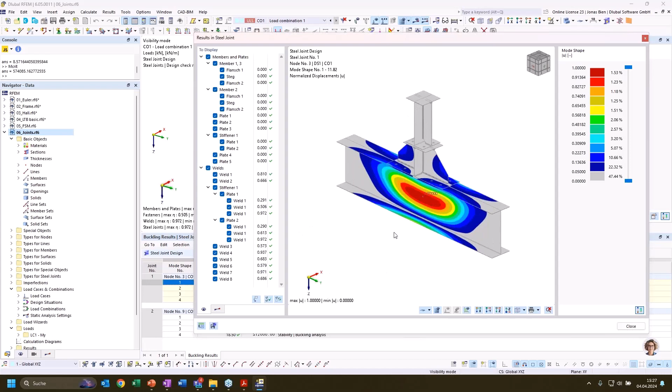I could take some measurements to avoid that, but I also need to take into account the critical load factor to judge how critical this mode shape is that we're seeing here. We see that for the critical load factor of 11.8, we get this warning sign, which just means the critical load factor calculated is lower than the default limit value, which is 15. But that doesn't necessarily mean we have a problem here.

The default bifurcation factor limit is derived from Eurocode 3 part 1.1, which is more for member design, and this limit of 15 should be conservative for most cases. But what I would suggest is to really study the mode shapes we observe as a result of this buckling analysis, and then see if we can extract limits for this critical load factor from the respective parts of the design codes.

In this case, we have some kind of web buckling under the concentrated load introduction here. So I would check chapter 6 of Eurocode 3 part 1.5, where web buckling under patch loading is treated, and see if I can derive limit values here.

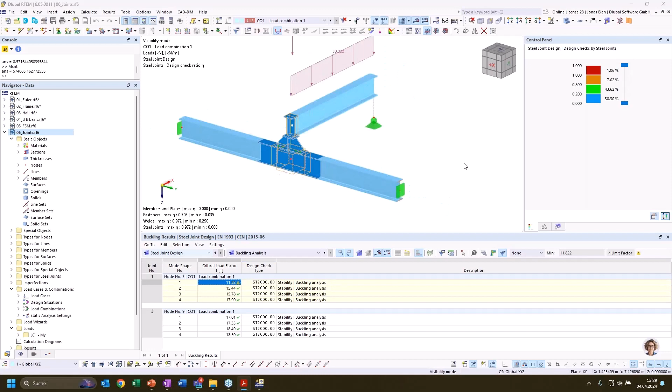If I know the correct limit value and want to improve the behavior, I can directly do that by modifying my joint. So I have a second configuration of this specific connection, where I just added a stiffener in the main beam, and we see the critical load factor for this configuration has already increased from 11.8 to 17 just by adding these stiffeners to the main member web.

If I observe or study the first mode shape, I see that my buckling panel is now divided by this stiffener. So every change directly affects the results of this buckling analysis.

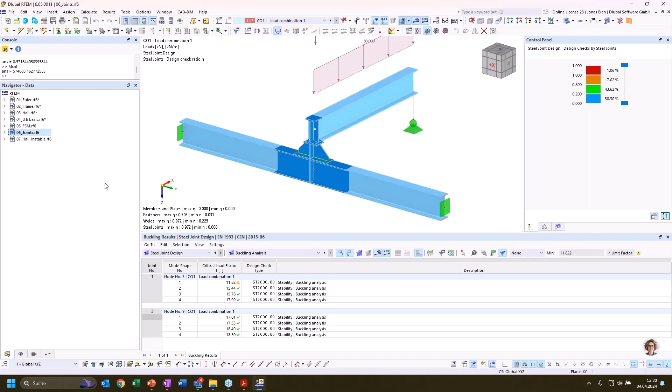Okay, let's move to the last point. I promised to also show you how we can use the structural analysis model add-on to troubleshoot when we have some instabilities within our model.

I prepared another industrial hall. It's very similar to the third model, but here I reduced the number of load cases a bit, and I worked with load combinations, and I introduced some mistakes which lead to an unstable solution.

So for example, I would have modeled all my structure, put in all my load cases, and now I would like to press calculate and grab a coffee and enjoy that my model is calculating for me, letting the computer do the rest of the job.

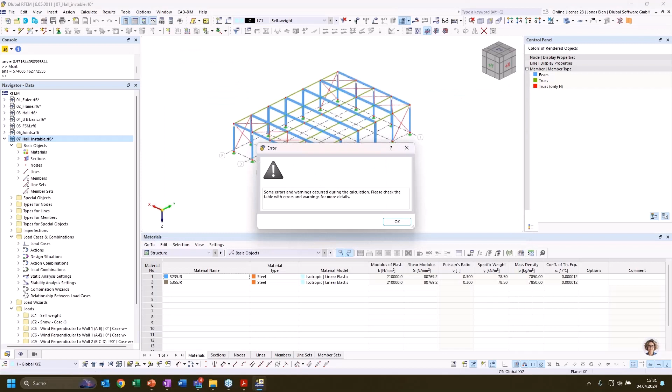But now, when trying to calculate the first load case, which is just the self-weight under first order theory, I get a warning message, and the program highlights that the stiffness matrix is singular. It also gives a hint where I could look for possible mistakes, but I can't really see anything wrong here.

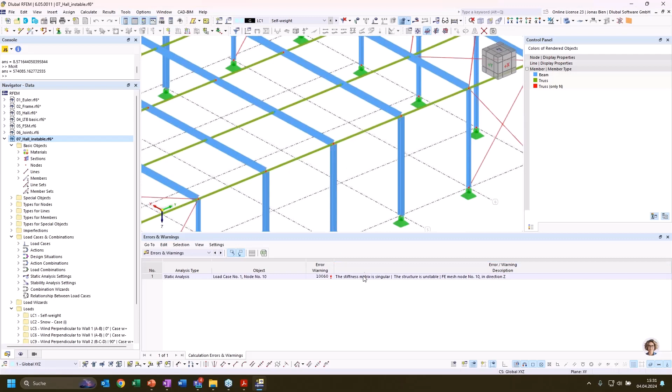I could now activate my structure stability add-on and conduct an eigenvalue analysis with a specific setting. In this case, when I want to check for instabilities, I can say it should calculate eigenvalues without loading for instability checks. So it would look for eigenvalues of 0 value and calculate the respective eigenvectors.

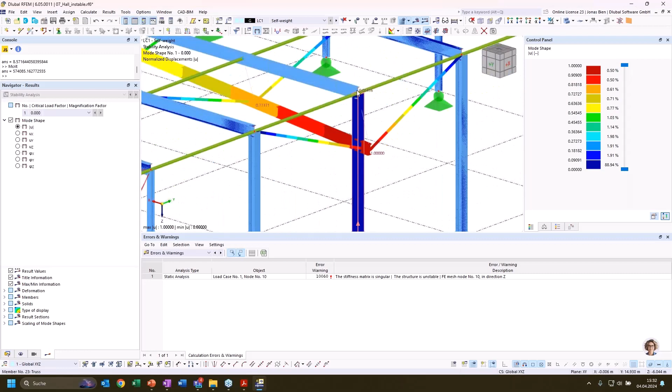What I see now is that the girder in axis number 4 is more or less falling down. It seems like it's not connected to the beam. When I zoom in, I see there are 2 separate nodes, and the column is not properly connected to the girder, which could be the reason for my instability.

So I quickly resolve this issue and now try again to calculate load case number 1. Let's see if it works now.

Again, I get an error message, and again I can try to get additional information with my structure stability analysis. So when I click through the deformation results, I see that for the rotations around the global x-axis, something looks a bit off.

I get very high deformation values, and it seems like the girder here in the last frame freely rotates, which indicates it's not properly connected to the columns, or some degree of freedom is not restrained properly.

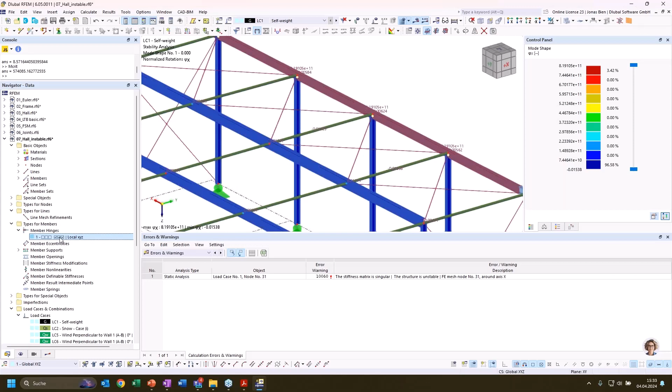If I look into the connection definition, I see I have a hinge on every column end, and I defined this hinge with rotations free in all 3 axes, which means this member can freely rotate at the top. Maybe that was a mistake - I wanted to establish frame action here, but accidentally applied the hinges to all my columns.

Now that I found this mistake, I can remove those hinges in the frame corners, and check a third time if the solution runs or if the simulation works.

And if I haven't done anything wrong, it should work now. Okay, now I get results for this first load case in my static analysis, which means that my model seems to be stable now. Now I want to go further and calculate all my load cases and load combinations.

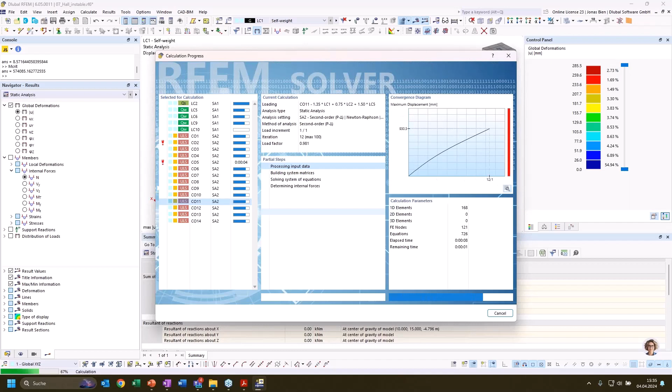That would be the second stage, and it's not clear yet that I have no problems with my model, because my load combinations I now solve with second order theory. And I again get only for some load combinations errors that my stiffness matrix is singular and my structure is unstable.

So this message can have two reasons. Either I have done something wrong in my modeling and I've disconnected parts, or some DOFs are free and not restrained in my model. Or it could mean that my system is really overloaded because I calculated according to second order theory. It could also be that I've reached the critical bifurcation load of my system.

And in order to check this, I would recommend going to the load combination that is problematic. For example, in this case, load combination 5 or 2, and I can just switch to first order theory and perform a linear stability analysis, just a regular one.

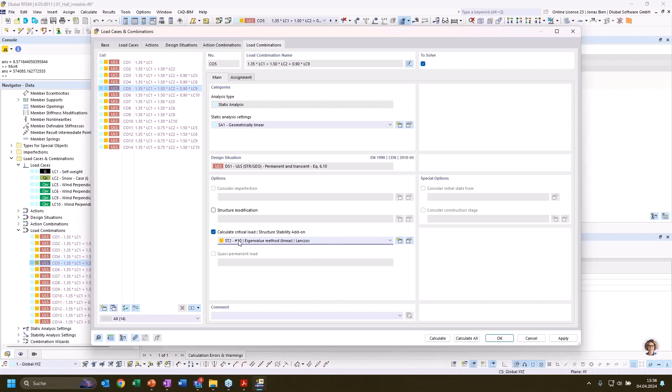Now I just use the second setting where I calculate 10 eigenshapes. I could have taken less because I'm only interested in the first mode shape. Let's go to the results for my load combination 5.

And what I can see now is that my critical load factor is below 1, and that indicates that my structure is indeed unstable because it is overloaded. And I can also check what could be the issue based on the mode shape.

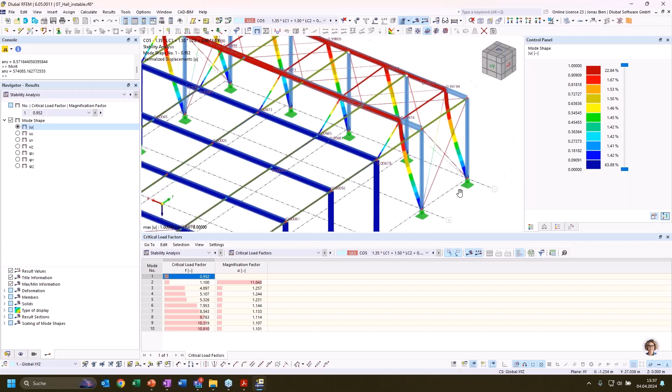And if I now look closely, I see that in my second frame I set the wrong columns. I set the columns from the end frames, which are much too weak for these internal frames. But this can also be quickly resolved by just copying and overwriting the member dimensions with the columns from frame number 3 or 5.

And if we now again perform the same simulation on our load combination 5, we will hopefully be able to get a suitable solution and a stable model. And now we can see, okay, with our first mode shape the critical load factor is above 1, and our model is good to go, and we have good chances that we can properly design the members within our structure.

Yes, these were my last words. As I announced at the beginning, it took me way longer than the 1 hour. I appreciate that, or rather, I should apologize for that, and I hope nevertheless that you learned something. It was not pure torture.